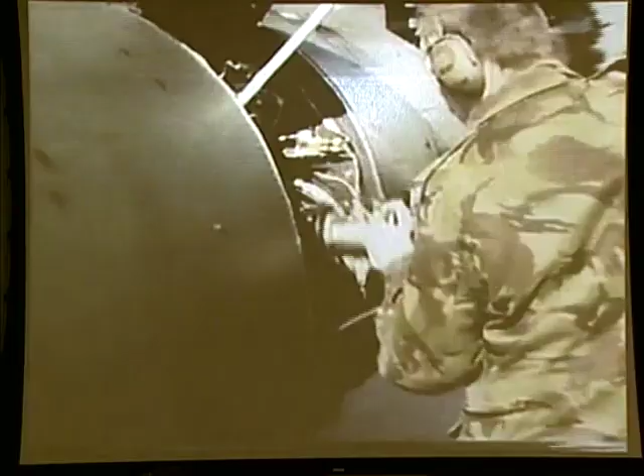A digitized cockpit management system, vibration reduction technology, and extended range fuel systems enable crews to fly complex missions with ease. Additional features that allow for water landing, operation in desert environments, and search and rescue extend the Chinook's already long list of mission capabilities.

Long a mainstay of the United States Army, with a fleet of more than 400 CH-47s, Chinooks also serve more than a dozen other international military forces as their transport helicopter of choice. The Chinook is also a lifesaver in civil disasters, handling relief missions in floods, hurricanes, fires, earthquakes, avalanches, and snowstorms, over 4 decades on 6 continents.

In the United States, the Army National Guard conducts civil relief, humanitarian, and environmental support missions across the country. Guard units from 10 states operate Chinooks to handle everything from engineering tasks to rescues. These missions often extend beyond state boundaries, making the Chinook a national asset.

In the mid-1990s, television news viewers watched a Chinook lift needed equipment into the flood-ravaged Des Moines, Iowa water plant to return that vital facility to operation for 250,000 residents.

Chinooks from California rescued stranded mountain climbers on Mount Whitney, an event documented on the TV show Rescue 911. 3 cross-country skiers stranded by an avalanche near Aspen, Colorado, owe their lives to a Chinook crew. No one else could have reached the skiers and saved them from brutal cold and sure death.

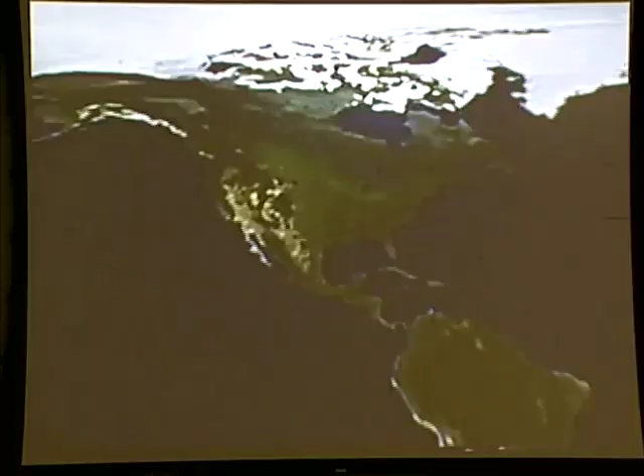Halfway across the globe, the flooding Sava River stymied U.S. Army engineers tasked with building a pontoon bridge for NATO peacekeeping forces moving to Bosnia. The engineers called for help from 4 Army Chinooks, which completed the longest pontoon bridge assembly since World War II in just 2 days.

Through a record-breaking fire season in 2000, commercial and National Guard Chinooks fought dozens of blazes throughout the U.S., dropping millions of gallons of water and retardant.

A Chinook can drop up to 3,000 gallons of water or retardant mix, more than most fixed-wing aircraft, with pinpoint accuracy even in 45-knot crosswinds on the deadliest infernos, and return with another load in minutes, unlike converted prop-driven bombers, seaplanes, and transports that may spend valuable hours returning to staging areas many miles from the fire line to refill their water tanks.

Chinooks perform life-saving missions lifting food, water, and building supplies into Miami, Florida after Hurricane Andrew, when storm devastation made roads impassable and survivors might have starved.

The U.S. Army's lifting capabilities are not, however, limited to emergencies in the United States. U.S. Army Chinooks carried tons of food, water, medicine, and clothing to save thousands of lives after Hurricane Mitch devastated several nations in Central America.

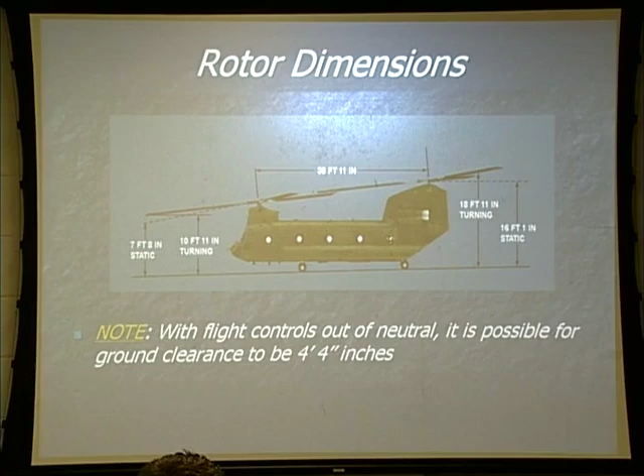I've shown you these dimensions, and I've talked about people walking into the rotor blades. Unfortunately, it has happened only once that we know of in the CH-47 community. Would you believe which rotor system hit them? You'd think it would be the front, but we had a blade strike with an individual from the aft rotor system.

This came out of Fort Lewis, Washington a few years ago. Pilots landed close to a hillside, lowered the ramp, and troops went out running up the hill. Pop - they got him. Be aware of where you park, and where your crew member or passengers have got to get in and out. A big, big aircraft.

Some more of the dimensions - our wheelbase is 22 feet 6 inches. You should have the opportunity while you're here to go out and do pinnacle landings. I'll talk about that again in a little while, and about our crew members.

We have the enlisted crew in the back, and the pilots up front. We've been doing this for a long time, and as a crew we work well together. I'll guarantee you when the crew member is calling you down on that pinnacle, trust him - he's making sure both those wheels are going to hit. He wants you to land safely on that pinnacle as much as you want to be there. On slopes, your crew members can see those wheels with our bubbled windows, and they're going to put you down there safely.

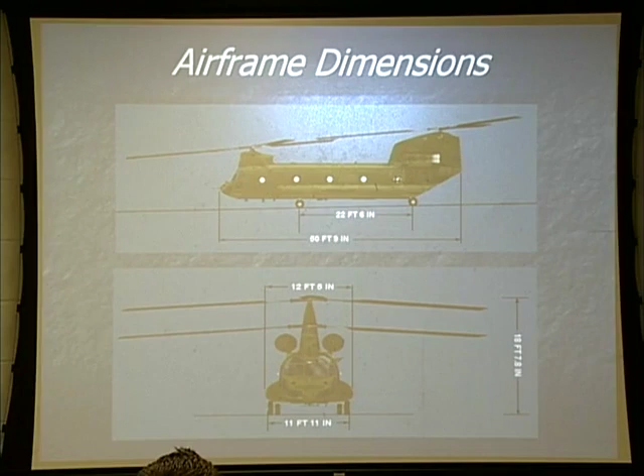Component locations. Again, this is a large aircraft - big, huge, with a lot of parts, which means we get a lot of write-ups. To make it easier for people to find these things, even out on the flight line doing talk with your IPs, to make it easier to identify the components and where they're at, we've broken it down into a couple of different things.

Everything on the left side of the aircraft will be number 1. When I talk about these systems in a moment, you'll see our electrical system on one side is number 1 system. Everything on the right side is number 2. If one component is on top of another component, 9 out of 10 times - there are some exceptions we'll point out in class - the component on top will be number 1, and the component on bottom will be number 2.

So now we've talked left side, right side, top and bottom, and then front and back. Our flight control system is broken down into 2 systems - up front in the forward pylon area will be number 1 flight control system, and the back area will be number 2. This makes it easier to identify the components and easier for us to write things up.

Any questions about anything so far?

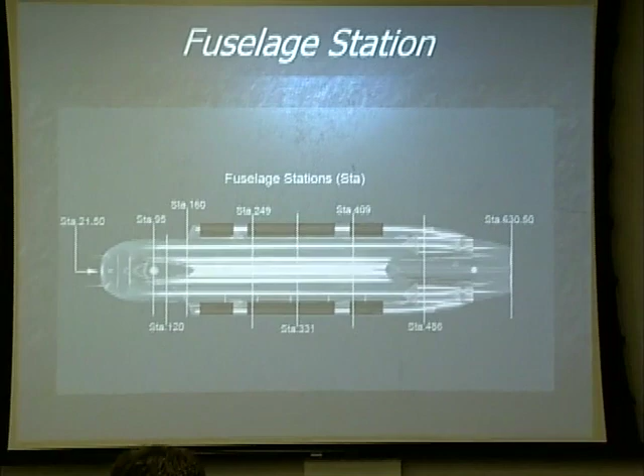Fuselage stations. Anyone here remember what a station is? What's a station number? Anybody gone through weight and balance before?

Station numbers are numbers we've identified as being in front of the aircraft, approximately 21.5 inches. 2 inches in front of our pitot tube is station 0 - that is inch 0. For every inch back towards the rear of the aircraft, that will be a station number. So station numbers are inches back from our imaginary reference datum in front of the aircraft. Some of the major component areas we're concerned with: from station 21.5 to station 95, for you gentlemen, that's home sweet home.

That's the cockpit - for most of you, that's home, that's where you're going to be at. But you're also going to be responsible for everything all the way back to station 630.5. From station 95 to station 120, we call that our companionway.

When you walk into the aircraft on the right-hand side to get into home sweet home at station 95, you've got to go through the companionway. Walking into the companionway in the middle of the aircraft, facing the front, on your left-hand side will be what we call the flight control closet. We will spend a lot of time there with Mr. Borneman. A little farther on the other side is the avionics compartment. On the right-hand side of the aircraft will be our heater compartment. That's all between station 95 and station 120.

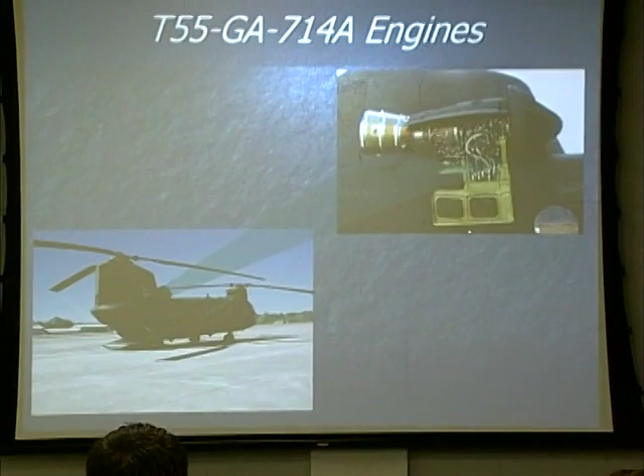Looking at this picture right here, what engine is that one right there? Number 2. All right, that's pretty much standard on most aircraft.

This aircraft's designed to fly during day, night, VMC, IMC, and water operations. And I'm here to tell you, if you ever get the opportunity to put one of these things in the water, do it, it is fun. That used to be part of your graduation here. It became too cost ineffective, and we stopped doing that.

Minimum crew. Here at Fort Rucker should be the only time you ever fly with 3 people, unless you take the opportunity and go with your test pilots in your units, which is a good thing to do and learn things from them. But most of the time we fly with 4 people on board. There are occasions, I think task forces started flying a lot of times with 5 people on board, 3 crew members in the back. In Korea, when we flew MEDEVACs, we put an extra set of eyes in the back. But most of the time you will fly with 4, a minimum of 3. Never fly without 3.

We do work well together. We are a crew. The enlisted should keep their respect, but we try to keep the integrity of the crew, and we work well together. We need each other.

Maximum gross weight of this aircraft is 50,000 pounds. With a crew of 4 and a full bag of gas, the aircraft approximately weighs 31,000 pounds. That leaves us 19,000 pounds for cargo. And you will learn a little later on how to trade off the fuel for more cargo if you need it.

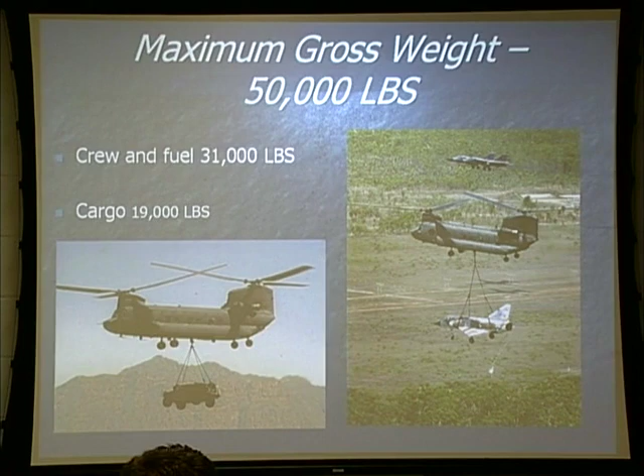Cockpit section, cabin section, ramp section, and then we've had to add the aft pylon section because of the way our rotor systems operate in tandem. We put an aft vertical shaft up there, but it is divided into 4 sections: cockpit section, cabin section, ramp section, and aft pylon section.

Are there any questions about anything we've covered so far? I know we haven't covered a lot. Components that are on top, or which components? Number 1. Good job.

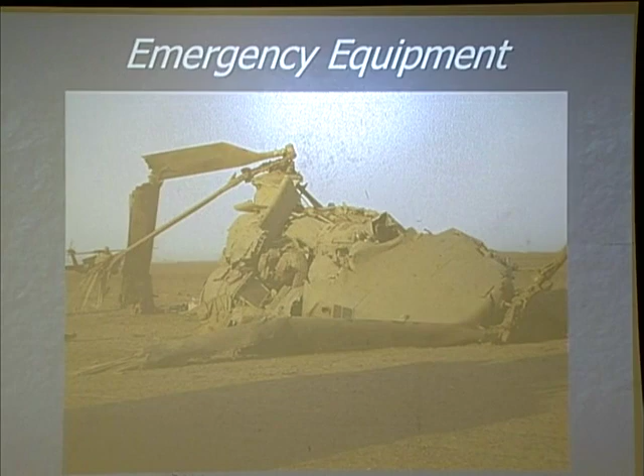All right, we're going to get into emergency equipment. When we start throwing these slides up here, we're not trying to scare anybody. We want to emphasize that the emergency procedures in this aircraft are important, and they're there for a reason. Unfortunately, the individual flying this one in the desert had a couple of lights come on, didn't pay that much attention. It got confusing and they ran out of gas. So, not a good thing.

Some of the emergency equipment in this aircraft: we have 3 fire extinguishers. There is one located in the cockpit on the pilot's side, the right-hand side. There is one located at station 120 above the avionics closet. And then there is one in the back at station 482 in the ramp, that the flight engineer will use a lot of times when we start our APU.

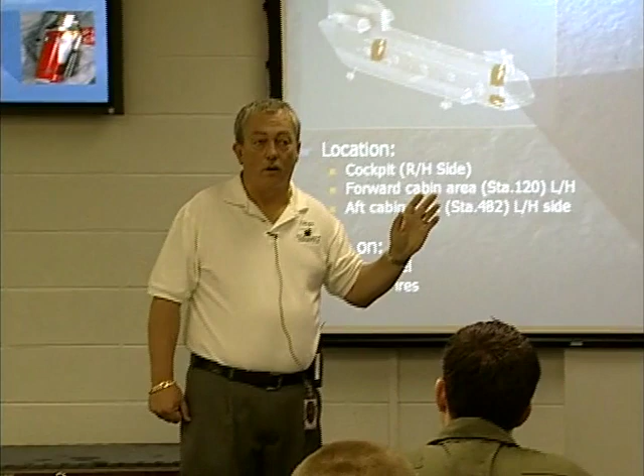These fire extinguishers are not to fight large fires or fuel fires. They are for personal use. If the aircraft catches fire, get everybody out of the aircraft, and if you grab those fire extinguishers and somebody's on fire, fight that individual. Do not try to fight the aircraft fire. This aircraft has a lot of magnesium in it, it's going to go quick. We can replace the aircraft, we can't replace individuals.

Troop alarm and jump lights. Again, station 120 above the avionics closet next to that fire extinguisher, there will be a red-green light with a troop bell. Back at station 575 on the left-hand side in the ramp area, there will be another set of jump lights. They use these primarily when we have our paratroopers on board. Red light means stay seated, green light means go.

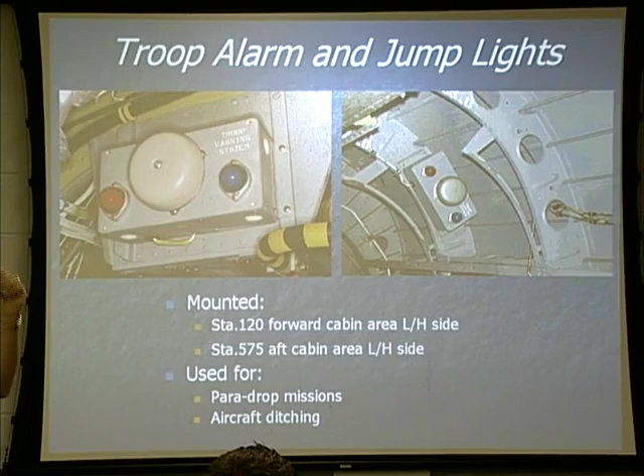The bell, believe it or not, with all the noise, both engines running, all 5 transmissions turning, rotors popping in the air, that bell can be heard. Use this bell during ditching procedures: 3 short bursts prior to impact, then one long burst and let it go. It should let everybody know what's happening so they can brace themselves in the back.

First aid kits. There are a total of 7 throughout the aircraft. The first one that y'all from the cockpit will be concerned about grabbing on your way out will be one in the companionway, and then there's 3 on either side scattered throughout the back of the aircraft. These first aid kits are their emergency equipment. They will only be used in the event of an emergency.

During pre-flight, there's a lot of safety wire and cotter keys and sharp objects on this aircraft. If you cut your finger and start bleeding, do not open up one of these first aid kits, because then when you crash and somebody needs it and it's not there, that's on you, not them. You have a survival vest. If you injure yourself during pre-flight and need to use something, use it out of your survival vest. When you turn it back into ALSE, tell them that you used it. These are to be used during an emergency.

As these things are opened up, they are inspectable. They've got inspection dates on them. If I open one up and put it back, I've just restricted the aircraft to 7 less passengers. For each first aid kit that's used and becomes unusable, I can carry only 7 less passengers.

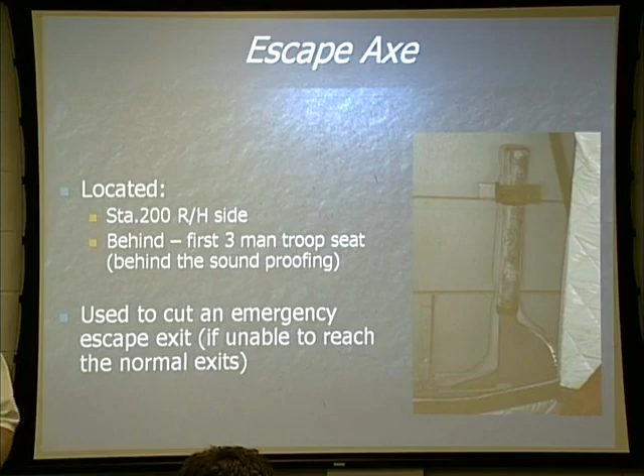Emergency escape axe. In the unfortunate event that we have to cut ourselves out of the aircraft, we have an emergency escape axe. It's located at station 200 on the right-hand side. When you walk inside the cabin door up front on the right-hand side, first 3-man troop seat to your immediate left, behind the soundproofing, will be this emergency escape axe.

When you pre-flight and it's on the checklist, just look to make sure it's there. You do not have to pick it up, look at it, and inspect it. Just make sure that it's there. It's a piece of steel that's not going anywhere. If you pull it out, you stand the chance of dropping it, breaking a toe, or putting a hole in the aircraft floor.

Emergency exit lights are designed to illuminate in the event you have a hard landing of 3 Gs or more. At nighttime, they give you a valuable asset of being able to tell you where the exits are on the aircraft. When I walk into the companionway or the cabin entrance on the right-hand side, immediately on top of that door will be an emergency exit light.

Right across the cabin area on the other side, there will be a panel, and there will be a light above the top of it. Then in the back, the ramp area by the auxiliary power unit, there will be another light. Again, when we have a hard impact, these lights will illuminate and show us the exits.

They can also be used even if they don't illuminate from the 3 Gs. If I've got to escape out of the aircraft and it's nighttime and I can't find a flashlight, I can reach up, pull it out and open it. As long as that red handle's pulled open, it will be used as a flashlight.

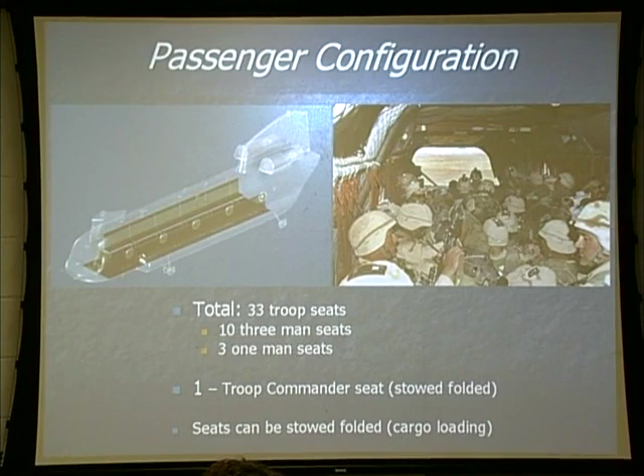Passenger configuration: we can carry 33 troops. In the back of the aircraft we have 10 3-man seats and 3 1-man seats, so we can carry 33 troops and seat belt them safely in the aircraft. There is one seat in the companionway, the troop commander's seat. We can also put the troop commander in there.

That would be a place where, while your stick buddy's flying, when you're here in school, that's where you'll be sitting. I want to give a little caution about the troop commander's seat and how it works. The reason is that one of our class commanders, 3 or 4 classes ago, thought that seat was locked up, got ready to crawl over it, and it fell through.

Our center console is up a little higher than the companionway floor, probably about this much higher. When his knees hit the floor, his face hit the center console. One time you can say okay, that's an accident—it knocked him out, pretty much knocked him silly. They wouldn't let him fly for a couple of days. When they let him fly again, he tried it again, and he did it again.

What happens with this troop commander's seat is it folds down, hinged on one side. There's a handle in the front of it. You pick the seat up, and it's supposed to lock in on some formers on the flight control side of the companionway. You push down on it, and a lot of people think it's locked and they crawl over it. Again, we are a crew of 4 most of the time.

Use that crew member in the back. You just say, Chief, I need to sit in the seat. You stand in the companionway, he pulls the seat up, locks it, and you sit down. Be careful—it's just something that happens. If you want to do it on your own, before you crawl over it, make sure that it's locked very well.

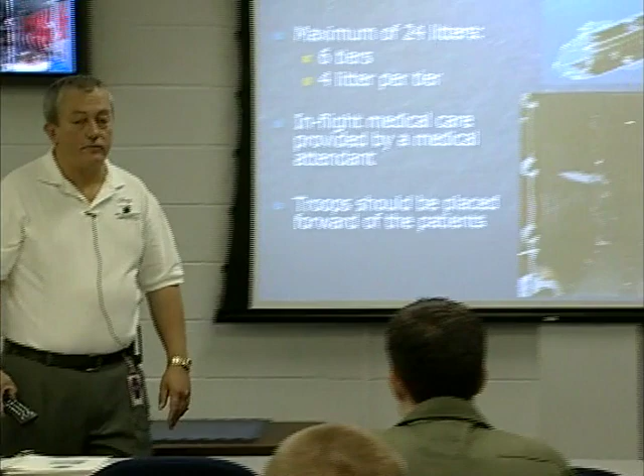We can carry litters inside the aircraft. Unfortunately, in the time we're living in right now, some of you will have to go to the desert and do this mission. We can carry 6 tiers, a total of 24 litters, inside the aircraft.

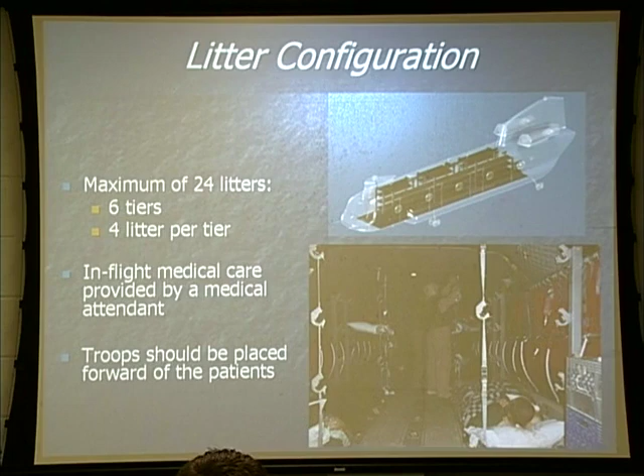There may be times where we need to mix litters and cargo, or litters and passengers. When we do that, the litters go to the back side of the aircraft, passengers go to the front side. Why do you think we'd want to do that? We want to get the littered patients out faster, and we can use the troops we put up front, as they exit the aircraft, to grab the litters and take them out.

Extended range fuel system, ERFS 2. Task force, guys, you're going to see a lot of these. These are the crash-worthy fuel systems. When we go through our fuel class we'll show you the old ERFS 1. In your Dash 10 it referenced ERFS 1. ERFS 1s were 600-gallon metal tanks, again non-crash worthy. We have taken these now—

They put 3 of them on the inside. All 3 of them will hold 800 gallons of fuel apiece. So now we've added 2,400 more gallons of gas to the 1,034 gallons we already have, so you can stay in the air for a long time.

Also, besides using it for ourselves, we have what we call the fat cow system, so that we can go to a field site, set up, and refuel the other aircraft. But we will talk about this in great length when we go through our fuel class.

There is a burn sequence on this. Now this one we do have to worry about CG with all that weight on the inside. When I'm using my ERFS tanks and burning them, I must burn the number 3 tank, which is the aft tank, first, and then go back up and burn number 1 and then number 2.

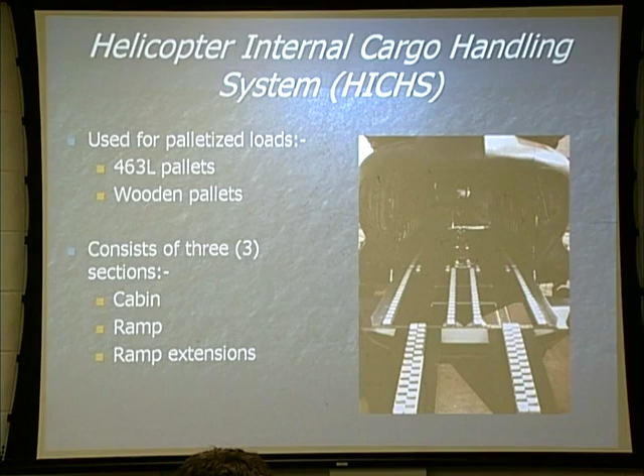We can roll them inside the aircraft, lock them to this roller system, and take off and go. So it saves time with loading, and it's just a lot easier.

We point this out now. We'll go through this during cargo handling class, but we point it out now because some of the aircraft on the flight line that you'll fly during this course has the HICHS system installed. Be cautious when you walk around in the aircraft. Another thing to be aware of is you can trip over these very easily.

We do not use them here, but they are installed. Fort Rucker is a big reset. Now that the war's going on, aircraft get worn out, they bring them here, we rebuild them, and we give them one of the ones that we've got.

Normal, emergency, and rescue entrances and exits. Now we'll start talking about some numbers here in a moment.

Emergency exits, like on all of our windows, there is a yellow tab. All of the windows in the aircraft are emergency exits. You pull on the yellow tab, it will pull out an inner liner around that rubber ring, and you just push the window out of the way. Same goes with the window that's in this big panel and with the panel itself.

It also has a yellow pull tab. When you've got somebody as big as I am, they can't fit through that little window, so you push that big panel out and they should be able to get through.

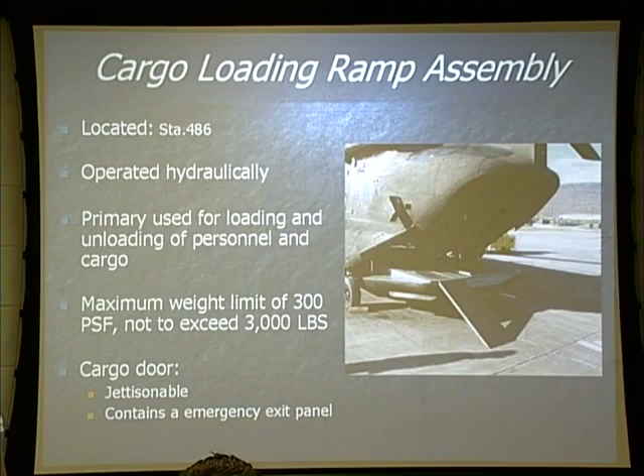The cargo loading and ramp area is also an emergency exit. The ramp is operated hydraulically. It comes up hydraulically—we'll talk about this during our utility hydraulics class. We use hydraulic pressure to bring it up, but it free falls down. So you have to be aware of that in a couple instances. If you're going to put it in the water and want to lower your ramp, you've got to lower your ramp before you put it in the water.

But this, again, is an emergency exit. It's where we use our primary entry and exit of the aircraft, and it can be used as an emergency exit. On the ramp, we have that 300 pounds per square foot limit we have to be concerned with. But on the ramp, we've also got to be aware that in the total area of the ramp, we cannot exceed 3,000 pounds.

Inside the ramp, it's hard to see in this picture, but there is a door, though a lot of the time you will not see it closed—I don't think you'll ever see it closed here at Fort Rucker. When the ramp comes up, about 4 to 6 inches from getting to the up position, it will stop. This ramp door will shoot out, and then the ramp will come up and seal. You'll hear me and probably Tom refer to it as the ramp tongue, but it's called the ramp cargo door.

It also has some escape panels on it. There will be a little yellow panel instead of a window in the middle of it, with a pull tab—you can pull it out and push that panel out. Also, on the bottom of that tongue when it comes out, there will be a big yellow handle. If that little panel is not big enough for me, I can pull on that yellow handle. If I'm right side up, the door will fall away. If I'm upside down, I can pull that handle, then I'm going to have to push the door away. But it is an emergency exit.

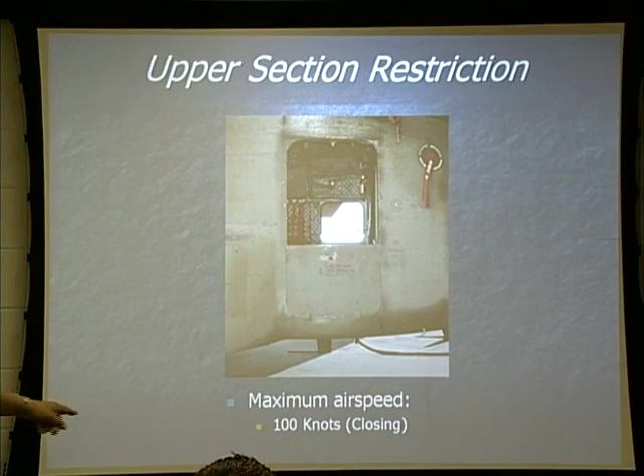You get flying, especially at altitude, it starts getting cool. You tell the chief, or the chief wants to tell you, hey, I need to close it because it's getting cool in the back. You need to slow down below 100 knots, because if I'm above 100 knots, I've released the lock and start lowering that door. When it gets about this close to being shut, a Venturi effect's going to take place.

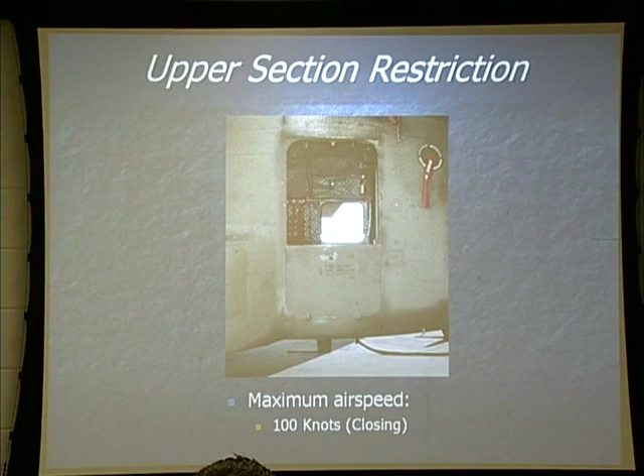And it's going to pull the door this way, and it's not going to stop. Been there, done that - dropped one in the middle of a parade field one time when I did that. It's going to hit that, and it's just going to pull it on through. Fortunately, my door went down, but it can go up and go through the rotor system. So we must slow down to 100 knots before closing that door.

I would even slow down a little bit further. Play it on the safe side. The lower door, the restriction.

To fly with this door down, or to even lower it in flight, I don't know why we would want to be doing that, but to fly with it down, you cannot exceed 60 knots, and it must be locked down. Once the door is lowered down, there is a little lock mechanism here on the side. Pull up on the back side of it, push it forward, and it will lock it down.

There will be a case that you may have to fly with it down. There are many times where you're out flying and missions change. You've already loaded internally as full as you can get. My cargo utility hatch door is covered up with a pallet that weighs 4,000 pounds, and crew members can't move it. Now they've called you over the radio and said that they want you to pick up some fuel blivets.

Well, normally the crew member lays in that cargo area to call a sling load. I have seen them, as long as we use the safety harness in the back, sit at this cabin door and call you in over a sling load, hook it up, and they'll monitor it in flight as best they can from that door area there. In Hawaii and in Norfolk, Virginia, the Navy has to film their ships every 6 months. They have to go around and take pictures of them to watch the corrosion. We have put photographers on those doors, but there are cases that you could fly with that door down.

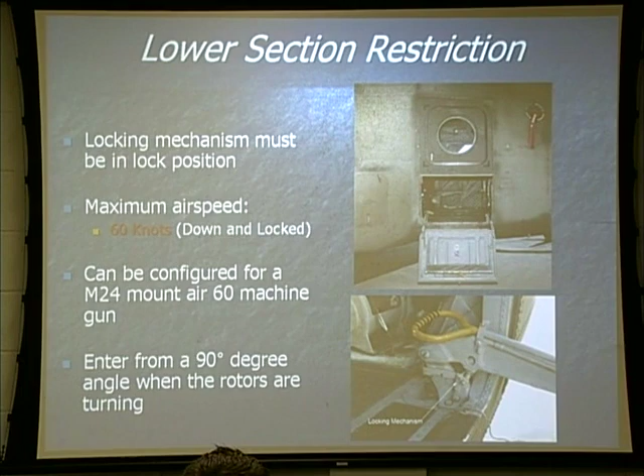All right, another limitation that we have to be aware of. So far, we've covered the upper cabin door restriction. Closing it was what?

Less than 100 knots. Flying with the lower cabin door down was 60 knots. Now, this door on the bottom of the aircraft has another limitation we have to be concerned with: 90 knots.

Anytime this door is in transition, we cannot exceed 90 knots. I can't think of a case other than a mission change in flight where you want that door open to lower the cargo hook for a sling load, or you decide you need to land in the water, so you stow the hook and close it. If you're doing it in flight, you've got to slow down below 90 knots or that door will leave the bottom of the aircraft.

As long as it is fully open, there are rubber mounts on the front part of it. It will swing up a little farther and back up against the aircraft against those rubber mounts. As long as it's all the way open or all the way closed, there are no restrictions, but they've put a restriction in there about the 90 knots.

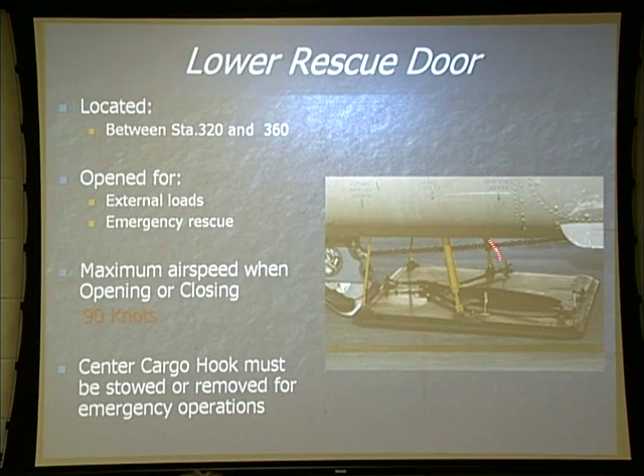It's one of the things to look for on pre-flight. Before you go fly, if they've got this door open, which is 90% of the time when you fly, make sure those rubber mounts are up against the belly of the aircraft. Because if they're back 2 or 3 inches and you exceed 90 knots, the strain on the motor and gears will give way and that door will fall down and leave the aircraft.

External cargo hooks - we've got 3 of them. As I go through this class, anytime I mention the center cargo hook and don't mention that it's the only one that operates off hydraulics, hit me in the head with something. Our forward and aft cargo hooks operate off electricity and manually, while our center cargo hook operates hydraulically.

Center cargo hook rated at 26,000 pounds. Again, we're going to airframe restrictions with this and the strength of the hook, because with the engines on this aircraft, we can lift anything. It's mounted at station 331.

There are 3 types of releases. First, normal release - we want to release it hydraulically if we can. If it cannot be released hydraulically, we try to blow the air charge inside it and release it pneumatically. If that fails, we have a manual release that releases all 3 hooks at one time - that's our last resort for releasing the load.

We'll break these down again when we go through the cargo hook class or cargo handling class. But now I want to give you another one of my silly cautions. You're going to get used to walking inside the aircraft with that cargo utility hatch door closed, walking around doing pre-flights in the flight control closet and on the ramp. Then one day during stage 2, you'll start going out and doing loads, and it'll require you to start pre-flighting that hook.

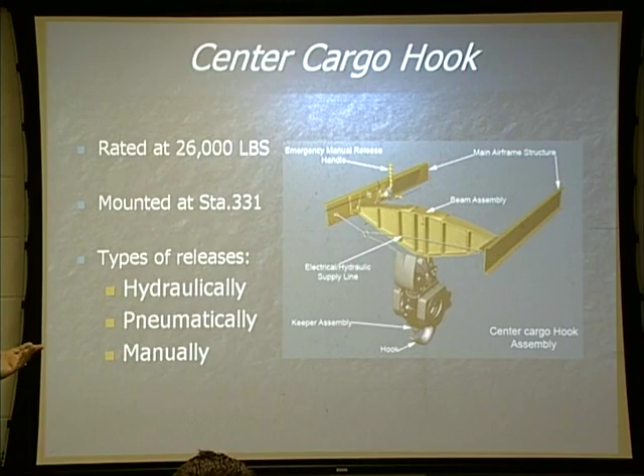That little cargo utility hatch door is going to be open. Don't walk through it. And when I say don't walk through it, there'll be 2 or 3 of you that will accidentally, sometime in your career, walk through it. I've done it, Tom's done it, John's done it. Unfortunately, one guy in Flight School 21 right now was set back 3 months because he walked through it, caught his knee on that beam, had stitches, and had to be put on medical hold for a while. It's just a safety factor.

We get comfortable with things. That utility hatch door is not open, and then all of a sudden it is open and we don't even think about it. In my case, we were getting ready to go fly. I opened it up to do the cargo hook check, turned around to go start the APU first, then remembered I forgot something up front, turned around and walked right through it. And I had just opened the door. Not everybody forgets that quick like I do, but I was young then.

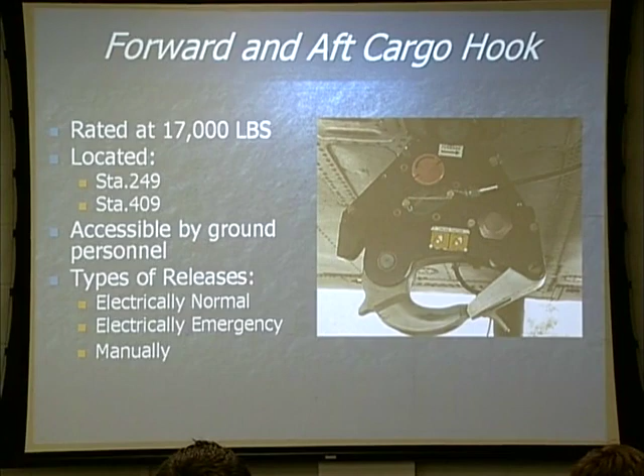Our forward and aft cargo hooks are rated at 17,000 pounds apiece, located at Station 249 and Station 409. These are accessible by ground personnel only.

When I start talking about loads in a moment, you'll see that most of the time when flying with loads underneath the aircraft, we try to do it tandem - meaning the slings are hooked to our forward and aft hooks. If we're going to do that, there has to be ground personnel. The only time you should probably be carrying anything on your center cargo hook nowadays is if we do not have access to ground personnel to hook it up to our forward and aft hook.

The crew members here are fantastic. They can land next to a block, go out and rig the load while you're doing your pre-takeoff checks. They'll put the sling on top of the block, call you over the load, drop a shepherd's hook through the bottom of the aircraft, pull the sling up to them, put it on the hook, and you'll go.

That will probably be the only time you'll ever use a center cargo hook, if you do not have any hookup personnel. This one is not hydraulic. We've got electrical normal release, and on another bus, electrical emergency release, and the same handle that releases the center cargo hook also releases the forward and aft hooks manually.

Our load configurations - what I just talked about with our center hook, we will only carry this when we do not have access to hookup personnel.

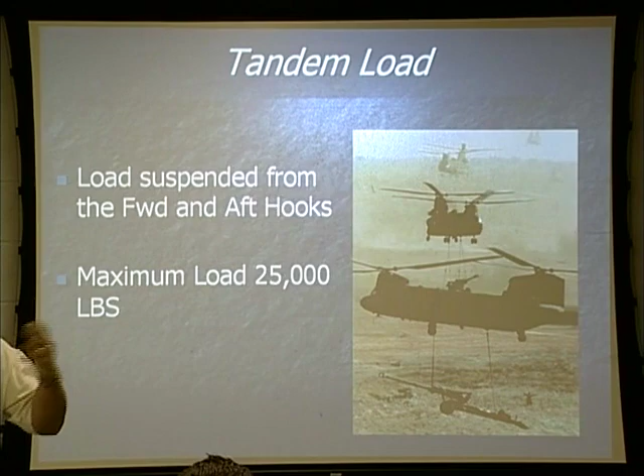Tandem loads, maximum is 25,000 pounds. Remember, the forward and aft hooks are rated at 17,000 each - we can't add that together and say 34. We have to be aware that one of those slings may break occasionally, and then it's going to swing forward. That 25,000 does exceed that 17,000 pounds, but it won't rip it out of the bottom of the aircraft.

This is a configuration that has become very useful in the desert, carrying out shorties and supplies to different locations, different drop zones. I can pick up 3 different loads and drop them off at 3 different places, being aware that I must pick up all 3 at the same place. They must be put together at the same place, but when I figure my weight and balance, I can drop them off at different locations.

It's worked very well, and it saves a lot of sortie missions from having to keep going back and forth. If you were real good, you could probably pick them up in different locations, but you're going to have to set one right next to the other and bring the cargo hook down, and it may throw you out of CG. Try to pick them all 3 up at the same place.

Air-to-ground towing is prohibited. I'm sure some of you have seen the Discovery Channel when that little 406 tried to pull a little ski boat. Didn't get very far. Evidently this guy made it, because I haven't seen any pictures on the internet of him crashing or anything, but that is prohibited. Do not try that.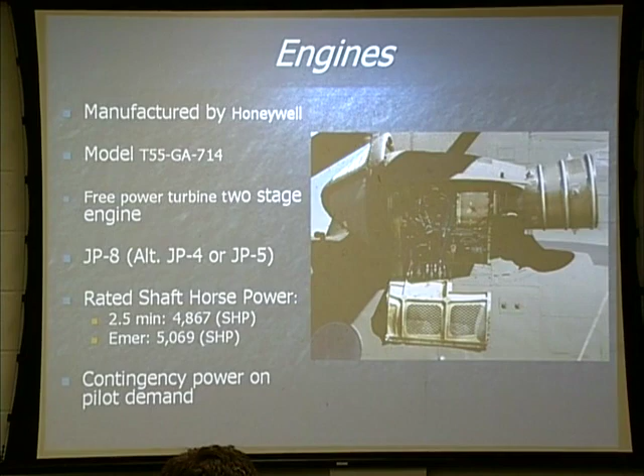Our shaft horsepower, now this is just per engine. When we reach our 2.5 minute rating, 4,867 shaft horsepower, one engine. If we need to go into emergency power, we have the capability of 5,069 shaft horsepower. So in an emergency situation, we have over 10,000 shaft horsepower if we need it.

Again, aircraft fully loaded at your limit of 50,000 pounds, if we lose an engine, you have single engine capability. Contingency power is on pilot demand.

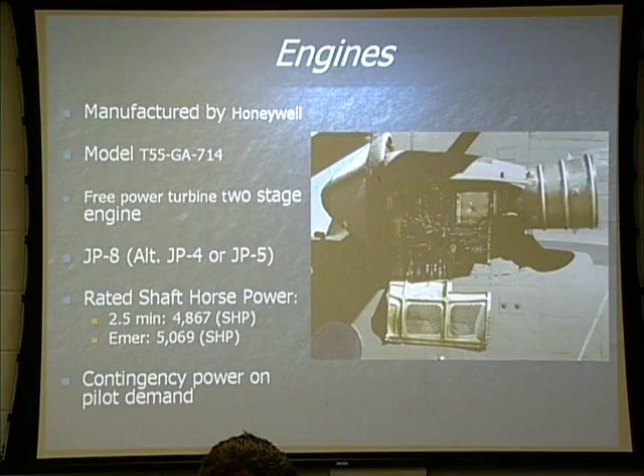We'll talk about the engines a little bit more in a minute, but we've gone computerized with the 714s. They're used to it on the Blackhawk or the Apache, which has a DECU, aren't their engines computer controlled? We're just now getting to that.

We'll talk about a FADEC system. It's a system, not a component. FADEC will consist of a DECU, nothing more than a little computer telling the engine how to operate, when to operate, and it monitors it for faults. And then we've got the HMU, which will be our electrical fuel control.

A little cutaway of our engine on the inside. Blue indicates N1 and red should be N2. As you can see, as we suck air in for our N1, the inlet turns one way, and then our N2 turns the opposite way. That counter-rotating keeps that engine from rolling off the side of the aircraft.

As we are producing power with our N2 section, it's a free turbine, and there's a shaft that rolls through the front portion of it. That's where we take the power we're producing out of the back, run it back through the inside of the engine, and it's mounted to our nose box transmission, which we'll talk about in a moment, in front of the aircraft, and then we distribute the power out a couple of different ways. Again, Mr. Borneman will give you a fine class on the engines and tell you all about them.

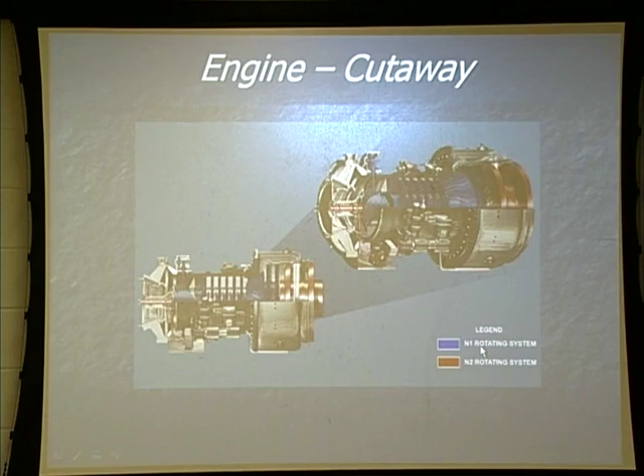Our engine control system, what I was alluding to a while ago, is called FADEC. Don't be asking anybody to see the FADEC, the FADEC is a system. It consists of a digital electronic control unit, a DECU, and a hydromechanical metering unit, that's our fuel control now.

Again, all you have to do with this aircraft now is reach up there on the engine start switch. Once you're ready to start the engines, push it over to the number 1 side or the number 2 side, and that DECU takes charge for you. It will start all the start process for you, where you don't have to sit there and hold the motor button and watch for things. It monitors everything for you. It monitors PTIT as it's rising, and if it gets too hot, it will shut things down.

Our transmission and drivetrain system. Again, we've got 5 transmissions. The first 2 transmissions that we're going to talk about are our engine nose box transmissions, or engine gearbox transmissions. They take the power from that N2 shaft running through the center of the engine, and they take it and turn it 90 degrees to our combining transmission.

Inside of there is a sprag clutch. I'm sure everybody knows what a sprag clutch is by now. What does a sprag clutch allow us to do in most aircraft?

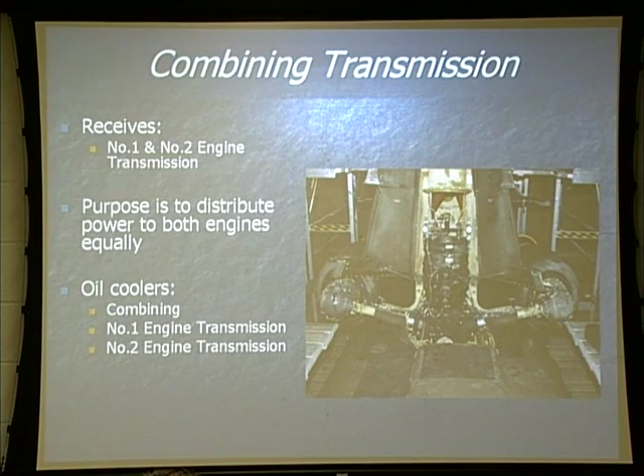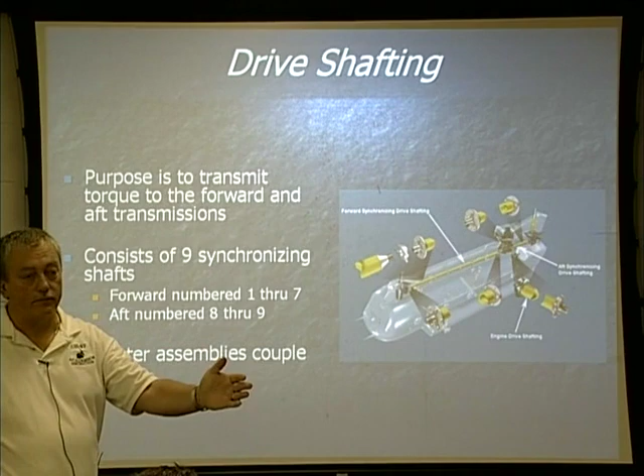Now we get into our drive shafting before we get into our forward and aft transmissions. There are 9 synchronizing drive shafts on this aircraft: 7 between the combining transmission and the forward transmission, and 2 between the combining transmission and the aft transmission. We have 2 engine drive shafts, and then they all have adapters and coupler assemblies.

Again, we will break those down. One of the things that I want you to be aware of while you're here at Fort Rucker, you will be lucky if you get to pre-flight the top of this aircraft twice. You'll really be lucky if you get to pre-flight it once. But do not take it that it's any less important than anything else on top of the aircraft.

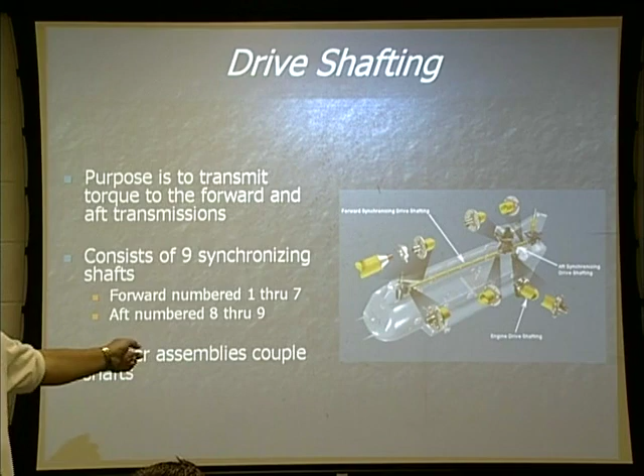You're going to see pictures when you go out to the flight line of a Pepsi can that was found inside the drive shafting area here after a flight. The drive shafting area in this aircraft is very important. It will not take long for it to cut itself in half. When you pre-flight the top of this aircraft, look for FOD around that drive shafting.

One other component that I want to point out that's not in your student handout at this point, that we'll talk about a little bit later on, is the aft vertical shaft. It has transmission characteristics, but it is a drive shaft. It has an oil pressure switch on it. It has a chip detector on it. It's a drive shaft - it's where we're taking our input from our aft transmission and turning our aft rotor system. You really don't know where to classify it, either as a transmission or a shaft, but it falls in between them.

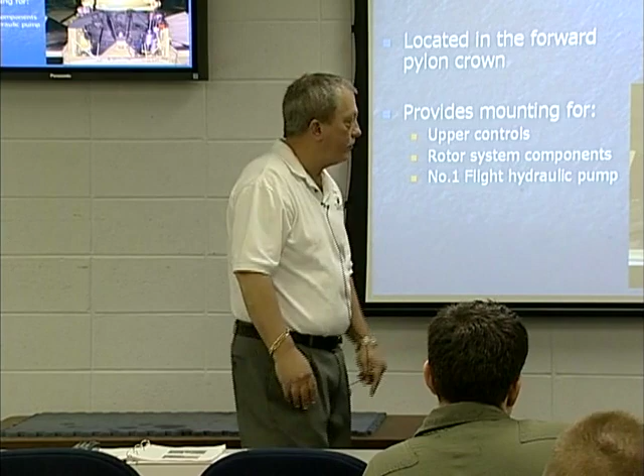Our forward transmission area provides our mounting for our upper controls, our upper dual boost actuators, our flight controls. And our number 1 flight hydraulic pump will be located on the bottom of the forward transmission. It has our swash plate on it, and it's located in the forward crown. When you walk up to the top of the aircraft and you pre-flight it, you've got 2 doors we call the doghouse cowling, one on either side. You can look inside and pre-flight it. Again, our number one flight hydraulic pump is located on the forward transmission - that goes to that front and back thing that we talked about earlier.

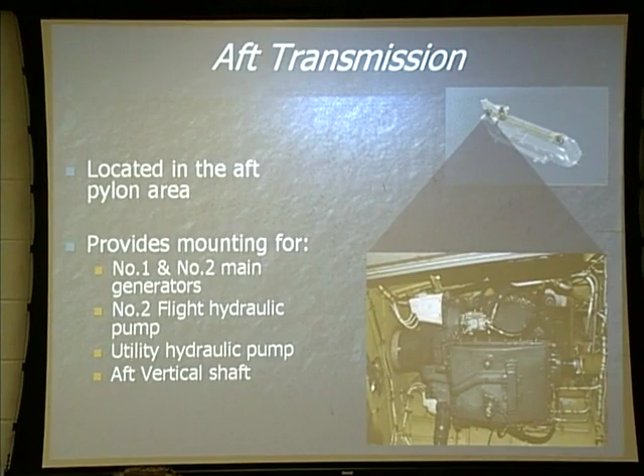Aft transmission - a few more components are located on the aft transmission than were on the forward transmission. Our number 1 and number 2 main generators are located on the aft transmission. Our number 2 flight boost pump is located on the aft transmission. And then our utility hydraulic pump is located on the aft transmission. And again, like I mentioned a while ago, that aft vertical shaft fits down on top of the aft transmission to take that rotation from the aft transmission up.

One of the things we've got to be aware of - I told you the forward transmission was mounted with our number 1 flight boost pump, and the aft transmission had the number 2 flight boost pump located there. That follows that rule we talked about earlier, front and back. Now you're going to be out on the flight line and somebody's going to ask you, what pump is that? Well, if I was looking at that right side up, that pump is going to be on the number 2 side. But that's not my number 2 flight boost pump - that's my utility pump. The number 2 flight boost pump is on the number 1 side of the aft transmission.

People are going to try to trick you up with that. You're going to be on the number 2 side, looking at the maintenance panel, talking about utility hydraulics. They'll put their hand on your shoulder and turn you to the number 1 side, talk about a few things, then turn you around and you'll see a pump. You just talked about utility components, so you might say it's a utility pump. No, we're on the number 1 side of the aircraft right now, in the aft, and it's the number 2 flight boost pump.

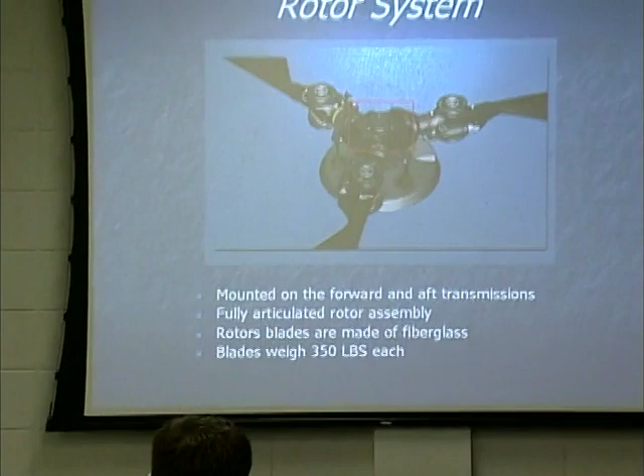Our rotor system is fully articulated. Our rotor blades are made of fiberglass. Each blade weighs 350 pounds.

As we go through our flight control classes, you'll find out we have at least 4 pumps in our flight control system. As a matter of fact, we have 4. Unlike the TH-67, OH-58, UH-1, OH-58 Alpha Charlie - I don't know about the Delta model - but the UH-1, if you lose your hydraulics, you can still fly those aircraft. If we lose the hydraulic system in this aircraft, you're not going to move the controls. Even if it went from mechanical to hydraulic back to mechanical to hydraulic, or if it was just straight mechanical, you would not be able to move the controls.

How many rotor blades do we have? 6, 350 pounds apiece, that's heavy. Each rotor system weighs anywhere from 400 to 600 pounds, the rotor heads themselves, that's a lot of weight to move. But our rotor systems again are fully articulated. What does fully articulated mean? It means we control the pitch change, lead and lag, and the flap on our rotor system.

Are there any questions on anything up to this point?

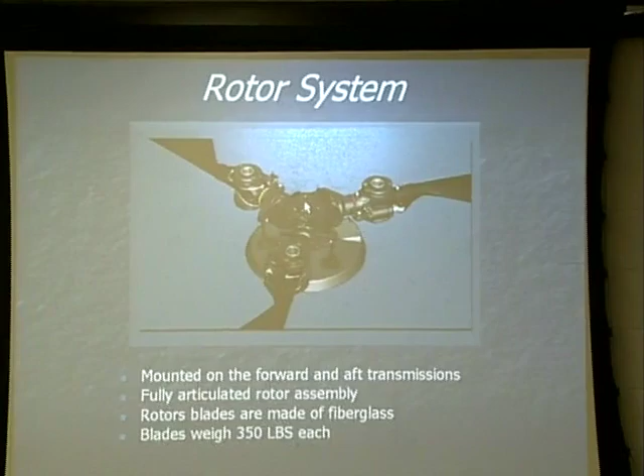All right, I've just looked at my student handout and it looks like there's a lot left. We're going to breeze through this. Again, these are things you'll get in-depth classes on. I just want to make sure we get introduced to everything on the aircraft so that when you go out here and start pre-flight, you have an idea of what you're looking at.

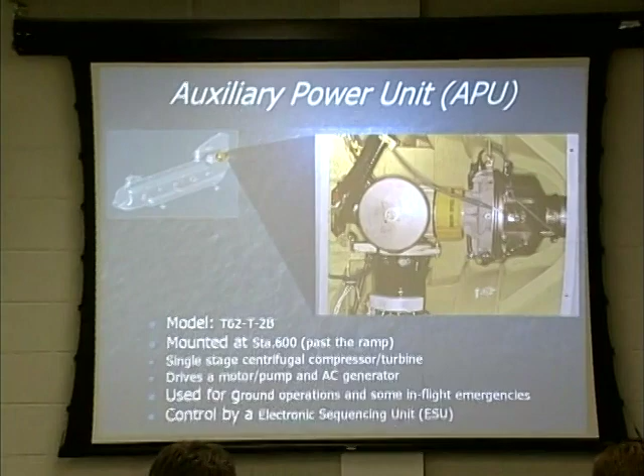Next thing, on page 37 of your student handout, is our auxiliary power unit, our APU. I'll usually kid all my old 58 people about this being their engine - it's pretty close. Mounted at station 600, it is a single-stage centrifugal compressor type turbine. It drives a motor/pump. When I say motor/pump, mounted on the front of the APU is a utility hydraulic motor pump. I need it to be a motor when I start the APU, but just as soon as I get the APU online, it turns into a pump.

It will be my utility hydraulic pressure until I get my transmissions turning. Once I get the transmissions turning, then I can cut my APU off and use my utility hydraulic pump. That means it's a backup. If I lose that utility hydraulic pump, I crank the APU up and I've got utility pressure again, hopefully.

It's also got a third generator on the back, and we'll talk about our generators in a little bit and how good that generator really is. But think about it this way: I use this generator when I crank the aircraft. It runs fine, operates everything perfectly. So those 2 generators mounted on the aft transmission, if they both fail in flight, I know I've got another backup there. There's redundancy in this aircraft - backup after backup after backup. So feel comfortable with the fact that when you start the aircraft, you're starting it with that generator. It is a backup aircraft, so don't panic when you get in the air and have a problem.

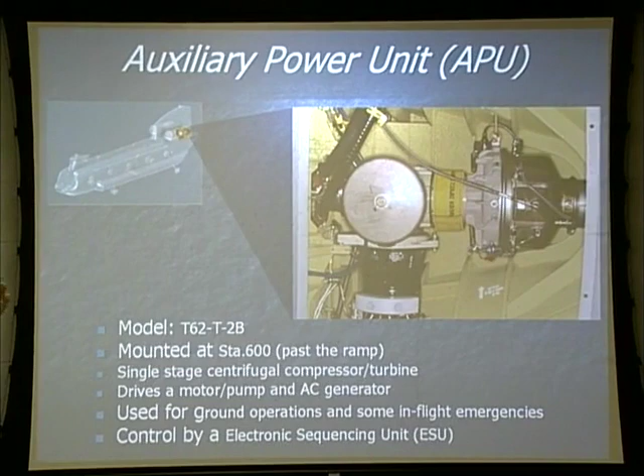We use it for the APU for ground operations and, like I said, for some in-flight emergencies. It's also controlled with a little white box called an ESU, electronic sequencing unit, just like the engines were with a DECU. It controls the start - I hit the start switch, it goes through its sequences, monitors the start for over-temperature and pressures, and will shut it off any time something is wrong.

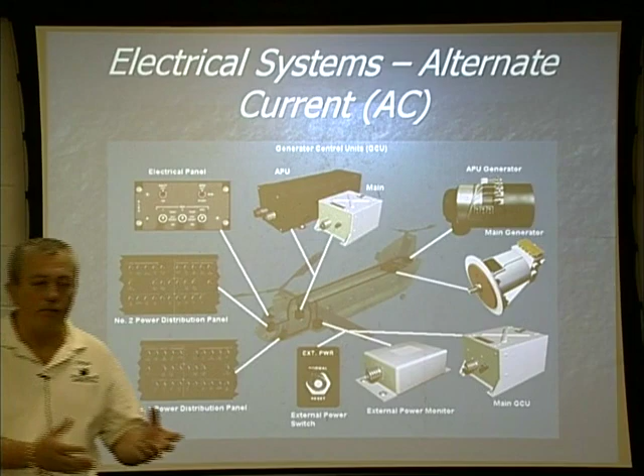Our electrical system, a big electrical system. When we go through our electrical class towards the end of this course, it's kind of hard to prioritize which classes you teach first. People ask why we're teaching electrical at the end when everything we talk about is controlled by electricity. Well, PPC is important, flight controls are important, so this falls towards the end. We're not going to make electrical engineers out of anyone. By the time you get to this portion, it's a 3-hour block of instruction. Tom will make you feel very comfortable about the electrical system in this aircraft.

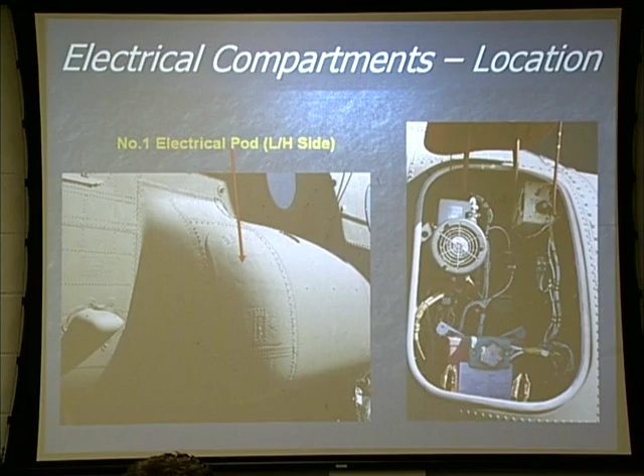On the left-hand side of the aircraft will be my #1 system. In the electrical pod up front, in front of the fuel system, you will find a generator control unit in there for our #1 generator. Our battery is also located inside there, along with transformer rectifiers. Everything that's on the left side is #1.

Our electrical panel in the cockpit, very simple panel. Battery switch, off, on. APU switch, that's where we start our APU, a 3-position switch. And then we've got our 3 generators. Again, you guys come in AQC, you've flown these aircraft, you should know by now. This will be one of those panels they expect you to do it with your eyes closed and memorize.

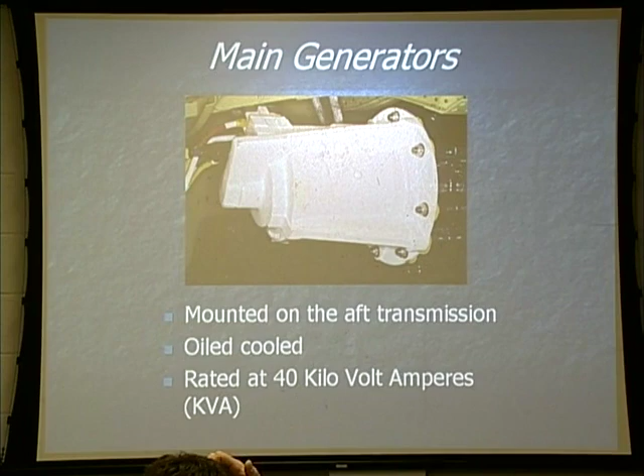Our main generators are located on our aft transmission, 2 of them. They are 40 kVA generators, oil cooled. When you go through your transmission class, you'll find out where it gets its oil from. 2 of them, again, 40 kVA, oil cooled.

Our next generator is the 20 kVA generator mounted on the APU. Charlie model and below, this was our generators, we had 2 of them mounted to the aft transmission. As you can see now, you've got power for days. We went from having 2 20 kVA generators, everything operating fine, to now having 2 40 kVA generators, power for days again. We do not have a lot of electrical problems, but this is your backup. This one is not oil cooled, it's air cooled.

Our DC system, again, is broken down in the left-hand, right-hand side, #1, #2 side. Transformer rectifiers - purpose of a transformer rectifier is to do what? Convert AC to DC. We have AC generators in this aircraft, we need to convert it back to DC. Most everything in this aircraft is AC operated but DC controlled, meaning I'm using my switches to open and close relays and let the AC power flow through.

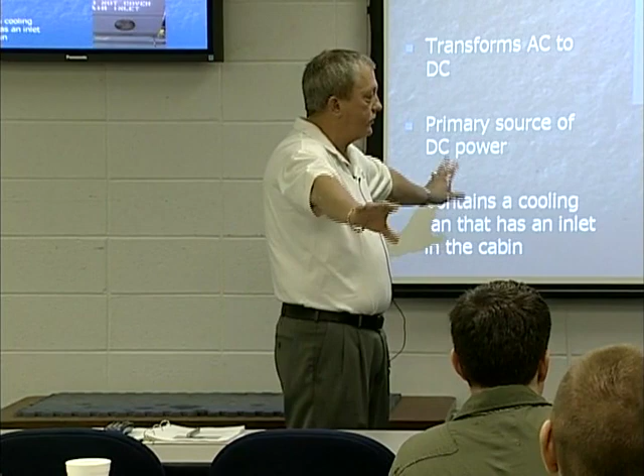One thing I want to warn you about with our transformer rectifiers - there's one on each side in the little compartments in front of the fuel cells. But on the inside of the aircraft, behind the first 3-man troop seat on the left side and the right side, behind the soundproofing, is a screen. We're coming out of the cold season, so most people do not wear their jackets on the flight line, but it is a big problem with people throwing their helmet bags behind the troop seats while you go fly. These fans, that's where they suck air in to keep our transformer rectifiers cool. Do not store anything behind the front 2 seats on either side of the aircraft. The transformer rectifier gets hot, then you're going to need to know your transformer rectifier emergency procedures.

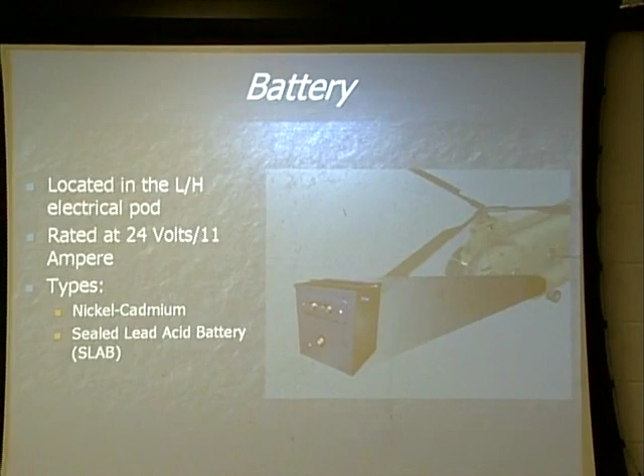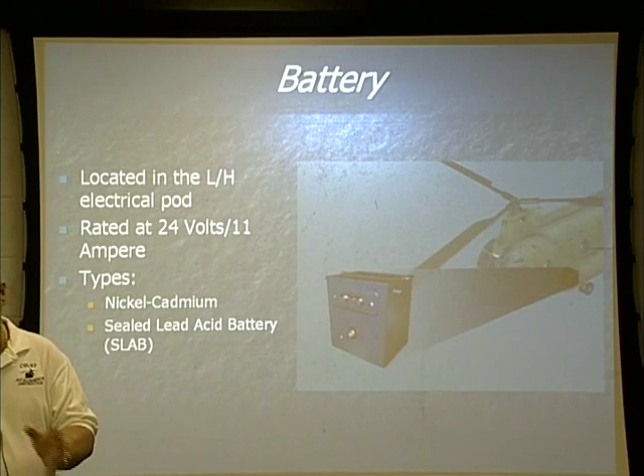Batteries - you're going to find out on the flight line there are 2 different types. This is another conversion that should be going on. We got the pink batteries out there as the slab batteries, and then we got the blue batteries, which are the NiCad batteries. When we are converting from our 712s to 714s, they are doing the change out, taking the NiCad batteries out of the system.

If I have a NiCad battery in the aircraft, also on the left-hand side in that #1 electrical compartment, there will be a battery charger. This was put in the Delta model Chinook to try to trickle charge the NiCad batteries because we were having a problem with thermal runaways. This was to help trickle charge it and to monitor it.

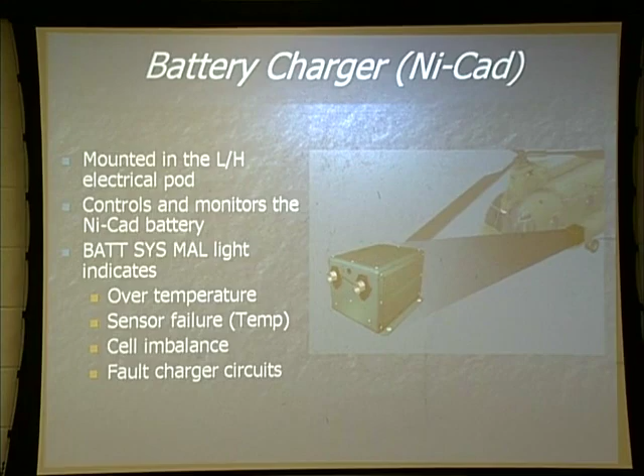With the 712s, if you get a battery malfunction light on the caution panel, then you must know your emergency procedures to reset circuit breakers for the battery charger. It monitors for over temperature in the battery and cell imbalance. One thing I want to caution everybody about, and I know I'm not talking bad about crew members, I speak from past experience - being on the flight line, you go out there in the morning and the battery's dead because somebody left it plugged in all night long. The easiest thing to do is go to the aircraft next to you, pull their battery out, plug it in, start your APU, turn the generator on, plug your battery back in, and let it recharge.

If I have a NICAD battery, that is a very bad thing to do, because that's when it tries to charge too quick and it can get into that thermal runaway.

But I had an experience many years ago with a Charlie model. Fortunately, the pilots were out there that morning. Got ready to do the pre-flight, couldn't crank the APU because the battery was dead. Normally, I probably would have done the bad thing, jump-started it. But I went and got a new battery that morning.

We were on our way to Fort Bragg, North Carolina. Halfway there, IFR, dual generator failure. And in a Charlie model, there was no backup generator. Had we not replaced the battery that morning, we would have all panicked.

Because with an old battery, you do not know how long they're going to last. 1 minute, 30 minutes, whatever. But having a new battery in the aircraft, you felt comfortable. I got 20 to 30 minutes to get the aircraft on the ground.

Do not let anybody jumpstart these batteries. In the field, in the desert, anywhere. It's an unsafe thing to do.

External power. Now, I don't know, I haven't seen too many of them hooked up to the Black Hawk or the Apache, but the 58s, I saw them hook them up, CH-47, and start the aircraft.

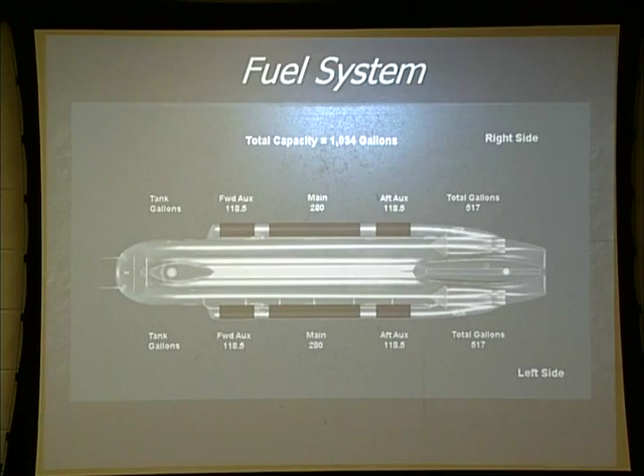Our aux tanks always empty out into our main tanks. Our main tanks feed our engines. That is the only place that the main tanks can draw, the engines can draw their fuel. The left side main tank will also feed the APU. The right side main tank will feed your heater.

I don't think there's anything else you need to know about those. We'll talk about it again in depth later on. Task force, you gentlemen will have to put up with the fuel class because you're only going to have 1 fuel cell on each side. Big fuel pods.

Single point pressure refueling. This was a great thing when they came out with the D model Chinook. Beats over winging it. Remember many a days cold out there at Fort Campbell at Son DZ trying to refuel a Chinook just like you do your car. It would take 45 minutes and it gets cold after 45 minutes. But now supposedly we can refuel the aircraft in 4 minutes at 55 PSI.

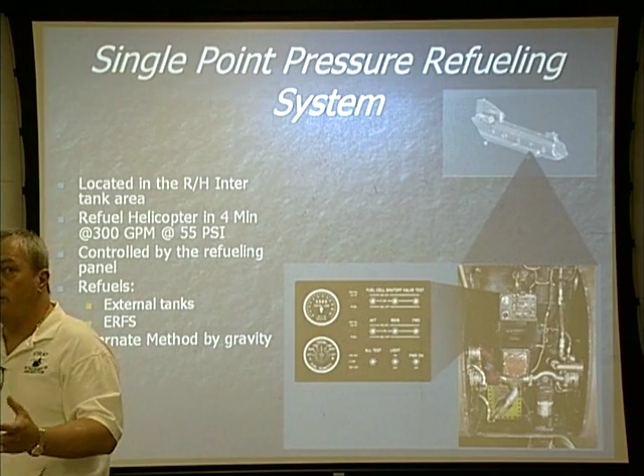Remember the 55 PSI. Not for anything on the test here, not for anything on the flight line. Most Army stations were going to operate somewhere around 35 PSI. But if you do cross-country flights and you stop at a civilian airport, or an Air Force base, be aware that their pressure may be higher than 55 PSI. If I try to refuel this aircraft any higher than 55 PSI, I will ruin the airframe of this aircraft.

Once those bladders start overfilling, they're going to crush the stringers and the formers on the inside of the aircraft. Reality is, when you go out to Goldberg and you start refueling, it will probably take you anywhere from 8 to 14 minutes to refuel the aircraft at what we've got going right now.

I can refuel my internal tanks, the ERFS, with a single point pressure refueling. Also, when I talked about the ERFS earlier, I can use those to run the aircraft. Stay in the air for a while.

Any questions so far?

Again, we're going to start running through this a little bit quicker. Try not to exceed our times here. Utility hydraulic system - this is one of my little pet peeves. I enjoy teaching this class.

A lot of things work off of this. Once we get in the air, there's not really anything we use off the utility system. But my utility system, when we go through that class, leads a lot into my flight control system.

Our hydraulic reservoir is located in the aft pylon area, between the number 2 engine and the aft pylon. When you go out to pre-flight every day, there will be a panel opened up. Inside that panel, we call it the hydraulic panel, you'll see our utility reservoir immediately on the right-hand side. You'll see a number 2 flight boost reservoir in front of you and several other components. The reservoir is where we store and cool our fluid till we need it.

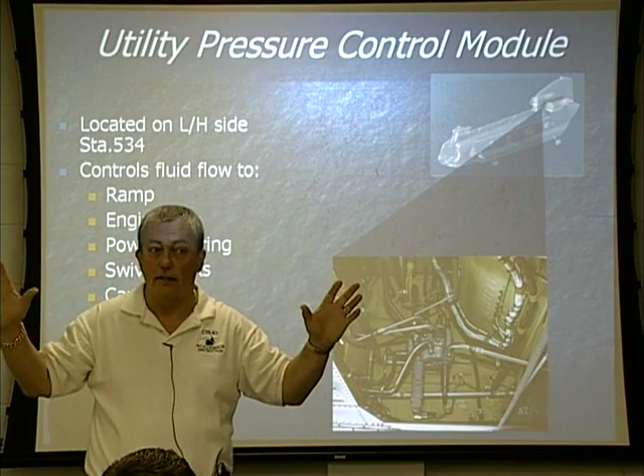There are 5 solenoid valves on the top of that pressure control module. Those 5 solenoid valves allow me to control the flow of fluid out of this, from the pump to all the systems that it needs to go to. So this gives me the ability that if I have a leak in flight in certain areas, I can start isolating those leaks and continue my mission. We've modularized everything, and it allows us to control those a little bit better. Those are some of the components that it controls the fluid flow to.

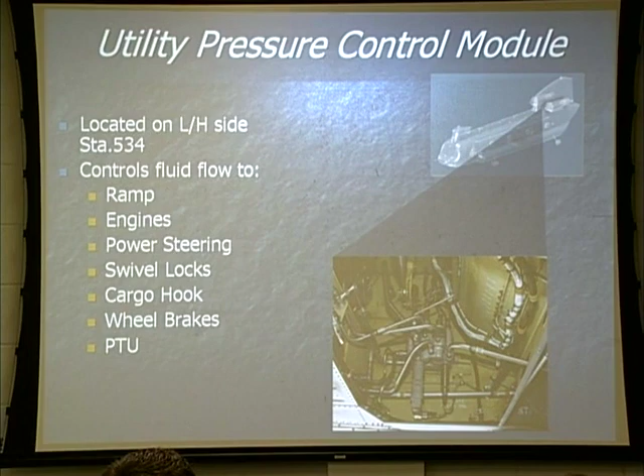On the opposite side of that, still standing underneath the 8 and 9 drive shaft, look over to the left-hand side - that's our return control module. After the fluid goes to all the components that it needs to go to, this is the collection point where it gets filtered again prior to going back into our reservoir, waiting to be used again.

What I need for you to start learning as we go through these classes, because people are going to ask you, there are 3 filter buttons on this return module. On the bottom, there's a filter button telling me when the filter gets clogged.

This little thing on top of the return control module, you will be asked about because it can be seen. It's called a transfer cylinder. It really doesn't hold but about a quart of hydraulic fluid, but it was kind of an afterthought. You'll notice that when you go out and pre-flight the ramp area, you'll look on either side at the ramp actuating cylinders. They are huge, and they require a lot of hydraulic fluid to operate. When I bring the ramp down, those cylinders need to be full of hydraulic fluid. So this transfer cylinder was put in there to allow us to have a little bit more hydraulic fluid for ramp operations.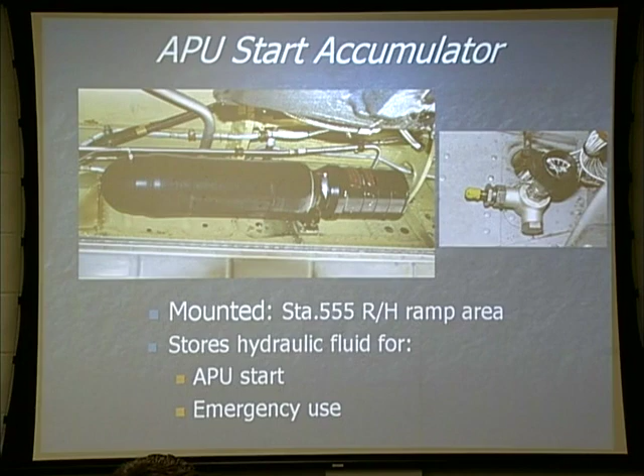You, as a pilot, may want to use some of the stored pressure there during pre-flight. So you go out, you need to pre-flight the ramp area, you need to look up a little bit higher, so we need to raise the ramp. Without starting the APU, we can use the stored pressure in there to raise the ramp. I will show you when we go through the utility hydraulics class how to do that.

APU start module, located on the number 2 engine side on the inside of the aircraft, station 584. This is kind of the governor, the brains that tells that APU motor pump when to be a pump and when to be a motor. It works in conjunction with the little electronic sequencing unit for the APU. The signals tell that motor when to be a pump and when to be a motor.

APU motor pump, located on front of the APU. This produces 3,350 psi of pressure. This is the only pump in the system that will produce that much pressure. We need 3,350 psi, you will see as we go through our engine class, to start our engines.

So once we get the APU online, we do our ground checks, control checks, and we start our engines. Utility hydraulic pressure, utility hydraulic pump takes over. We use it, everything else will operate off 3,000.

Keeping in mind that when we're flying along and I have an engine failure in flight, if I need to restart it, I have to start the APU because it's the only thing that gives me the 3,350 to restart that engine.

Utility hydraulic pump, located on what side of the aft transmission? Right, number 2 side. Number 2 side of the aft transmission. It will produce 3,000 psi of pressure for me. It will constantly produce 3,000 psi of pressure with a variable flow rate of 0 to 16.5 gallons per minute.

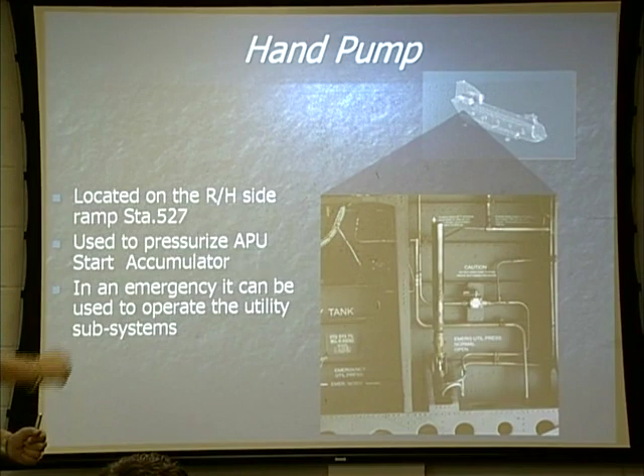Oh goodness. In the Chinook world, he who dumps pumps. If you accidentally dump all the pressure that we had stored in that APU start accumulator, this is how it gets back in there. It's a double action pump, meaning every time I pump on it, the pressure is going either way. I'm pushing hydraulic fluid inside that big black accumulator, APU start accumulator, with that hand pump.

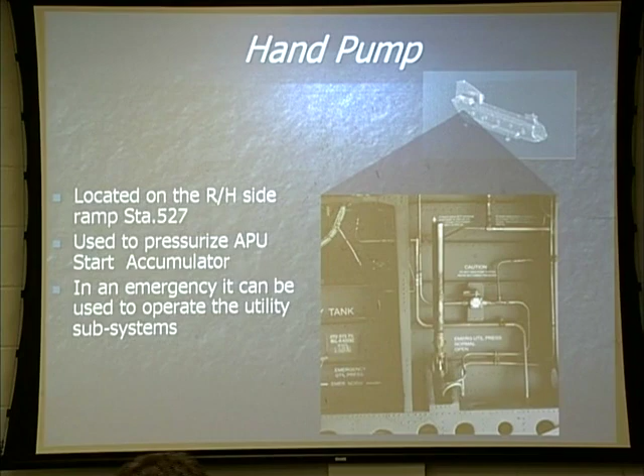Sometimes we accidentally shut the APU off. That APU start switch up front is spring loaded back to the run position. And when you go to start, if you pull your finger through it, it will go back through that run and back to off. If that APU does not reach 90% speed, it will not recharge that large accumulator. Thus, somebody's going to have to get back here and pump this. Hopefully, that won't happen too many times. It'll wear a crew member out.

Our fill module, located in the ramp area just a little bit aft of the hand pump. I'd say within a year and a half of the Delta model being introduced into the system, this was not on the Charlie models, B's or C's. Within a year and a half of this being introduced, this paid for itself. Task force went down to South America. On the way back across the water, way out across the water, to the point of no return, they developed a hydraulic leak. This allows you to service the hydraulic system in flight or on the ground.

Being the crew members they had plenty of extra fluid on board. They pumped all the hydraulic fluid because that's what goes in there is hydraulic fluid. They ran out of hydraulic fluid. Unfortunately, had to start mixing oils, transmission oil and engine oil, put it in there. They were to the point where they were running out, almost ready to do bad things. And they hit land, but it did pay for itself.

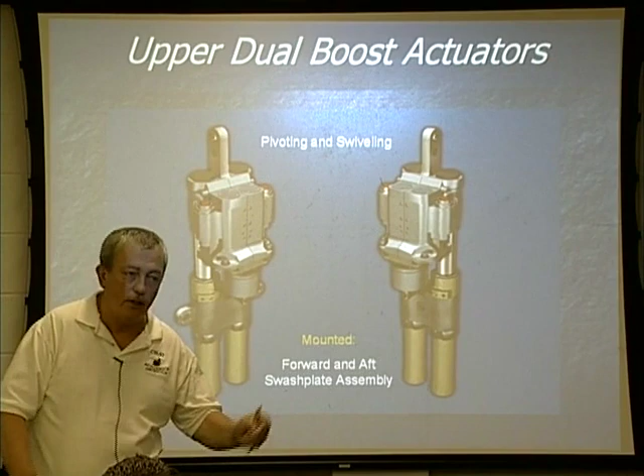Our upper dual boost actuators - no matter what control input we put into the aircraft, whether it be with the cyclic stick, with our pedals, or with the thrust, some kind of movement will go to our upper dual boost actuators. They are mounted up in the forward transmission area and the aft transmission area with their swash plates.

They are two different kinds. There is a swiveling and there is a pivoting actuator. And you're going to be required to be able to identify which is which.

The pivoting, if you look at it on one side, no matter which way you look at it, one of the ears should form a P - P for pivoting. Swiveling will have a bolt going through the middle so it can swivel back and forth. One's on the opposite side of the other. Their pivoting and swiveling movements prevent any kind of lockup of the swash plate up top.

Another easy way to remember it is which side does the pilot sit on in an Army aircraft? On the right-hand side. So in the pilot side up front, pilot sits on the right-hand side, right above him is the pivoting actuator. In the back, it's opposite. P for pilot, P for pivoting.

They have jam indicator buttons on the top of them. You'll be looking for those during pre-flight. They're just like filter buttons - they can be reset, cycle the controls. If they stay in, they're good to go.

They also operate off 3,000 psi of pressure. As you can see, they control the movements of the swash plate. One side of that actuator is the number 1 system, one side is number 2 system. Should a system fail, never fear - that 3,000 psi of pressure on that opposite piston will drive that actuator.

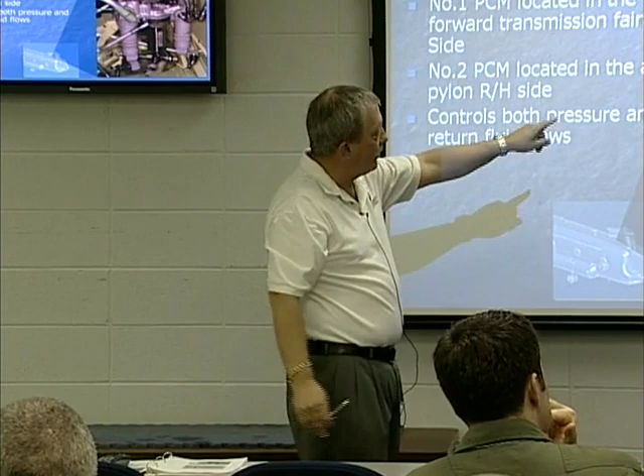And the flight control system - we call our control a power control module. What they have done is they have taken the pressure control module and the return control module that we had in the utility system, and combined them. We do not have all those solenoid valves on top of this one because we can't isolate this system like we could the other system. So they've combined them. Our pressure filter and return filter are there on these.

The number 1 is located in the forward pylon area. The number 2 is located in the aft pylon area. They also have filter buttons on them and they have pump fault buttons on them.

This is a good picture to show you the number 1 flight boost system in a nutshell. There's the reservoir for the number 1 flight boost reservoir, or for the flight boost system. From the reservoir during our engine starts, fluid will go to our PTUs, power transfer units. From our power transfer units, it will go to our power control modules and then be distributed out to wherever it needs to go. But our flight control systems do not have a lot of components.

They operate a lot of components, but that's pretty much a flight control system in a nutshell.

Pumps, forward transmission, I've already told you where that was at. Number 2 is on the number 1 side of the aft transmission.

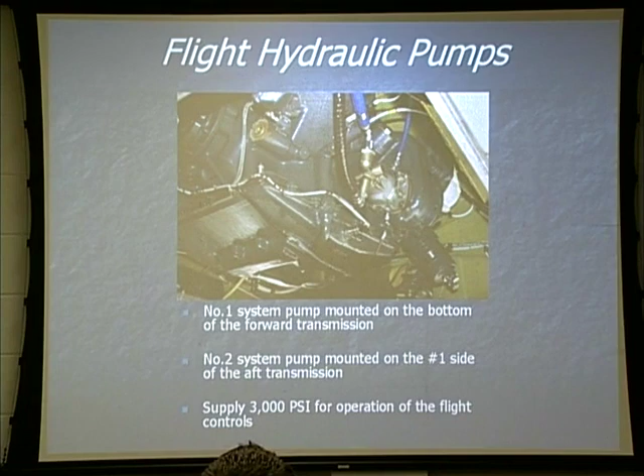Again, like the utility pump, this produces 3,000 psi of pressure constantly with a variable flow rate of 0 to 16.5 gallons per minute at 100% rotor. A pump is a pump is a pump. All 3 of the pumps, both flight boost pumps and the utility pump, are the same pump. If I look them up in the parts manual, they all have the same part number, the same stock number. It's just a matter of where they're mounted and what lines are hooked up to them.

Our hydraulic panel on the overhead console switch. As you start looking through your -10, they're going to refer to something called an isolation switch. There's nothing on that panel called an isolation switch. What they're talking about is once we develop a leak in the utility system, the ability to isolate something. If my power steering leaks, I can either flip this switch up and disable the power steering right there, or I can reach down on my center console and just turn off the power steering. Because you're going to find out when we go through class that that one switch right there will actually disable 3 systems. I've got power steering, swivel locks, and brakes on this switch. But if I can isolate it just by turning my power steering switch off, I've isolated that system.

I can control the flow of fluid to my ramp. I can turn it off or I can turn it on. My power transfer units, since they operate off of the utility system, if one of those starts to leak, I can turn it off. But again, there is nothing on there that's marked isolation switch, just the ability to isolate something.

Now we're going to start getting into our flight control closet. Any questions about flight controls?

Hydraulics, flight control hydraulics. This is a little bitty part, but it has a big name: lower control pressure control module. We'll start talking about our AFCS here in a little while.

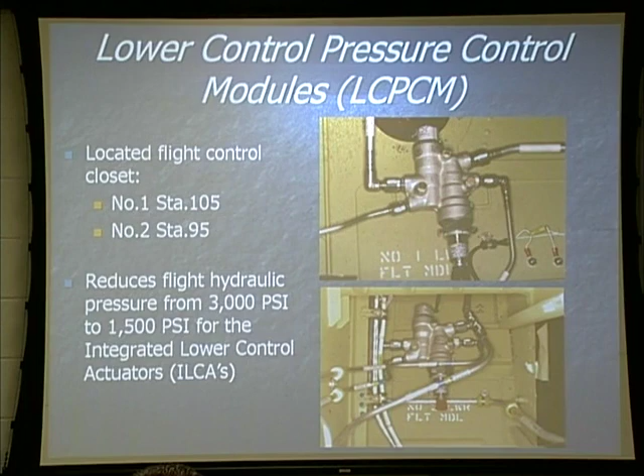Our integrated lower control actuators, our ILCAs, located in the flight control closet. These are what operate off of 1500 psi. There are 2 portions of this. There is a boost side. The boost side of the extensible link, or the ILCAs, is something that we cannot control the pressure to. We want 1500 psi of pressure going there all the time. That is the boost. When you make a pilot input, that is the hydraulic boost that you get from moving the controls.

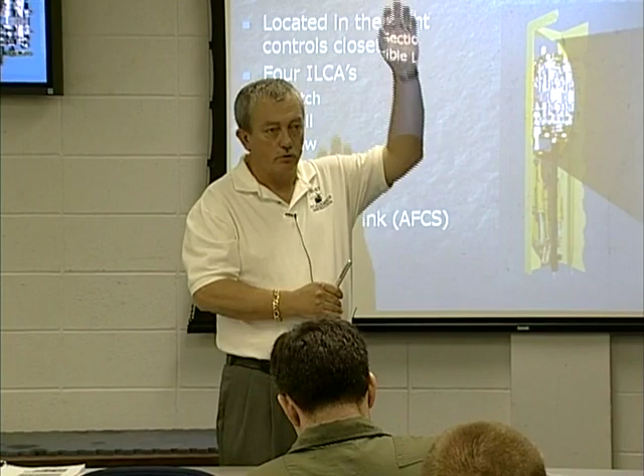The extensible link side is our AFCS side. In our pitch, our roll, and our yaw, we have an extensible link. That is our AFCS, that is where the AFCS inputs go to. You'll notice when you become the person sitting in the troop seat, if you can pull the soundproofing back and watch those extensible links, you'll never see anything in your life work as hard as those things do. They're moving up and down as fast as they can. They are taking those outside forces, the wind, the turbulence.

So it does the same thing as a SAS actuator? Actually, if you will look at these, they are marked SAS links. Before in the Charlie models, that's what we had, was a SAS system. But now they work in conjunction with our AFCS computers, and they do a lot of things for you.

Tom will have to be the one that really sells you big on this AFCS. I wish I could tell you a lot more about it. He's really knowledgeable about it.

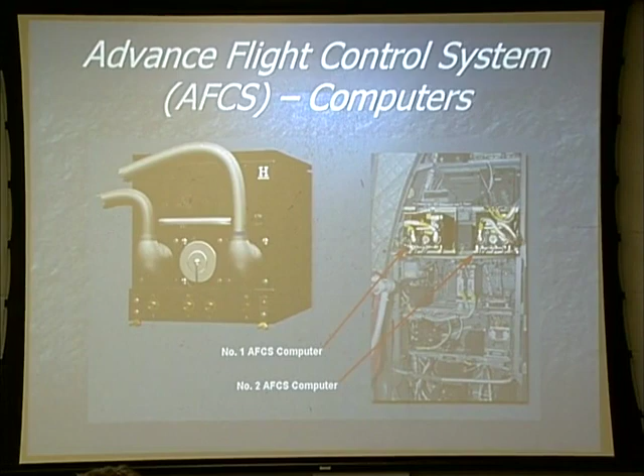But we have 2 AFCS computers inside the avionics compartment, identical in operation. So that tells us we've got 2 separate systems. I can lose one system and it should not affect the other system.

What AFCS does for us, some of the things that it does for us is pitch attitude hold, bank angle hold. Now I know in the OH-58 and TH-67, I don't know about the Black Hawk and the Longbow. When I go into a bank turn, if I hold that cyclic over there, is it going to continue to roll over?

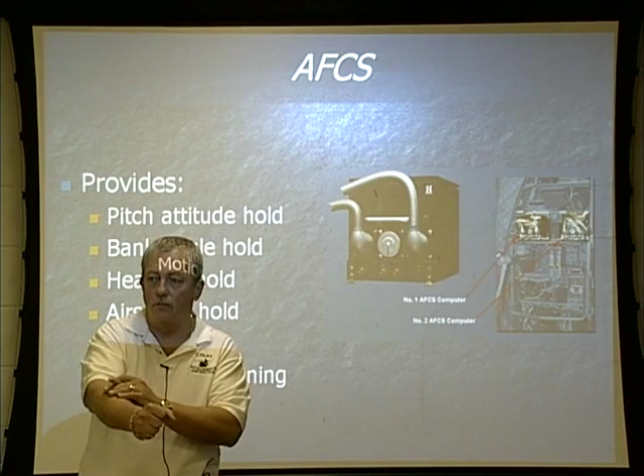Not for the 60s, you've got the automatic. But what about a Longbow? If I put in a little bit of cyclic and turn it over, is it going to continue to roll over? It will. And then the Chinook, well, like the 60s, I can pick out the bank angle I want and hold it there, and it's going to continue to go in that little circle I've put it in all day long until I either run out of gas or pull it back up. It will not continue to roll over. That's one of the features it does for us.

Heading hold. From the time I pick this aircraft up to a hover, it is going to hold the heading for you as long as my swivels are locked. It will hold the heading. Airspeed hold, altitude hold, and motion dampening. Those are things it does for you.

This is Cadillac. It's almost fully coupled. The gentlemen going to task force will get one that is pretty much fully coupled. It will almost come into a hover for you. I think it will come back in and do a 50-foot hover and then go down from there.

AFCS, again, some of the things that are in there. We've got a dash actuator and a pitch system that provides for pitch attitude stability, airspeed hold, and a positive stick gradient, meaning whenever we nose this thing over trying to get 160 knots out of it, the LCTs and the dash actuator are all going to work in conjunction to level that fuselage back out for me, but it's still going to hold it at 160 knots.

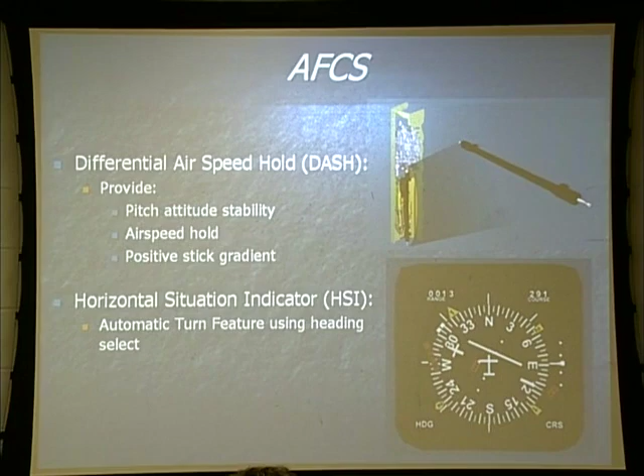Any other questions? What is the total flotation time for water operation? 30 minutes. And why? Fuel cells -- we don't want the fuel cells to collapse. The flotation time is 30 minutes to drain the water out.

Which transmission receives input from both engines? What is the weight restriction on the ramp on the CH-47 Delta? 300 pounds per square foot and 3,000 on the ramp. On the inside, it's just the 300 pounds per square foot, or whatever CG allows us to get away with. What is the length of the cabin on the CH-47 Delta?

What is the purpose of transformer rectifiers? AC to DC.

You will notice that -- where does the practical exercise start? Page 61, there is a practical exercise. Probably page 63 is the answer. Do not look at the answers before you give it a valued effort on all these practical exercises. Again, I promise you, if you take the time to listen to what we put out in class and take the time to do the practical exercises, there will not be any surprises when it comes test time. We will cover it one way or the other. If we don't, you've got it on film now.